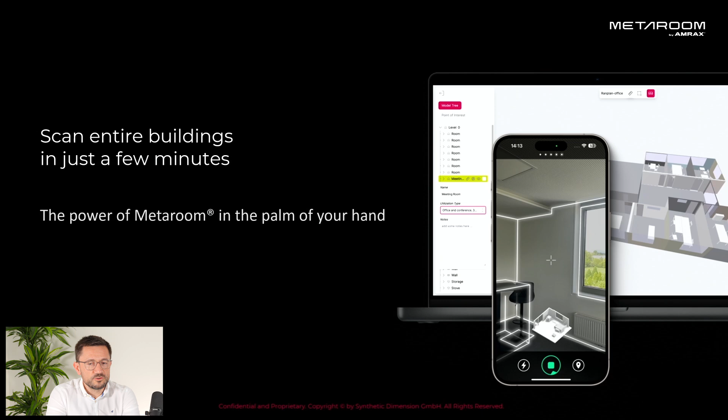So let's jump into the solution. You can see here on the right side 2 pictures. One is the Metaroom Scan app, which is running on iPhone Pro and iPad Pro. And in the background, you can see our platform, which provides you a web interface to optimize and then also export your scans. So basically the workflow is always: you go from capture with the phone to the studio, which is running in the browser.

What are today's challenges? When we take a look at the different use cases across different industries, we often see tape measures, folding rulers, and sometimes laser measurement tools. These cases we can see everywhere, and basically this is kind of our competition. And also after measurement on site, you need to create a 3D model. So this is the second step after doing the measurement.

Clearly this is something we see across different use cases, where the one doing the measurements and the one doing the drawings of these measurements are not always the same person. We've heard and seen this story a lot: person one does the measurements on site, sends these measurements to someone sitting in the company, and then there's a question - maybe a luminaire is missing or some measurements are missing - and a call is set up to ask person one, 'hey, do you remember what was here in this room?' Typically person one is not on site anymore, and then this cycle of problems starts like an engine. This altogether takes time, and that's exactly what we want to solve with Metaroom.

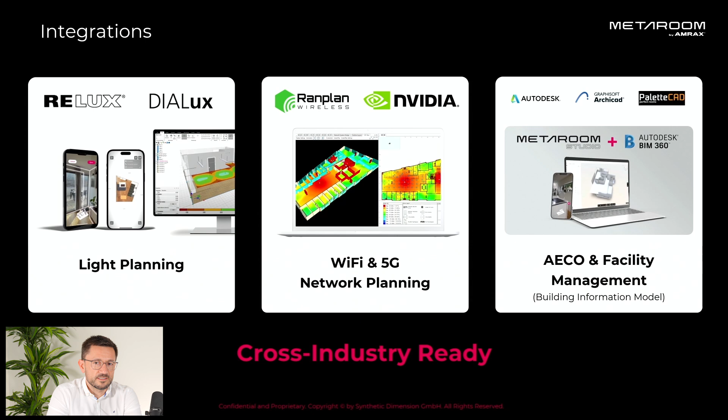When we come to the solution in more detail, let's start with the capture process. Every customer journey typically starts with this: people download the app, they start scanning, and I want to talk to you a little bit about the KPIs of this technology and also what you can expect.

I think it's easy to use. As you can see on the right side in the video, you can see these white lines that also represent what you already captured and what is missing. You can add specific information. Henrik will go over this a little bit later.

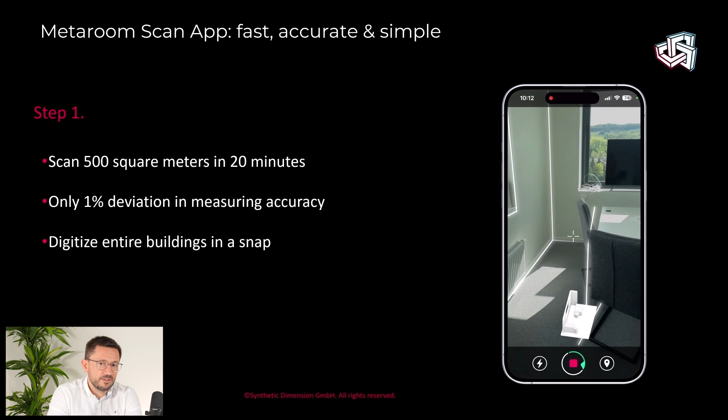When it comes to accuracy, typically one of the first questions is, how is the tolerance in measurements, how accurate is it? I have to tell you two things before that. One, a newer device performs better, so an iPhone 15 Pro is better than an iPhone 12 Pro. And it's also true that better light conditions create better scans, so the more light you have, artificial or natural, the more accurate the solution. Typically, when we are not in bad conditions, we perform with 1% deviation, which for a standard room means 2 to 3 centimeters deviation from one wall to another.

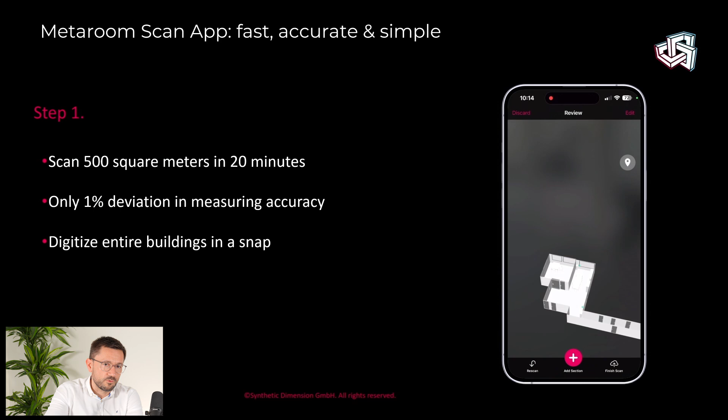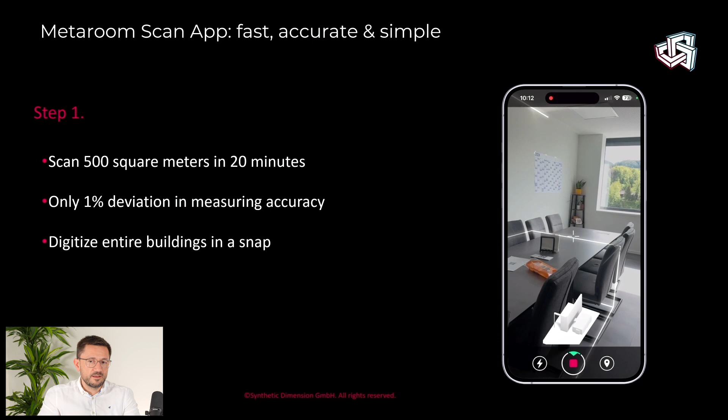The second typical question is, how big a scan can I do, and how can I scan a full building? We'll jump into this in more detail later when it comes to scan techniques. But what we can tell you now is that there are basically no hard limitations when it comes to floors. You can scan a room, multiple rooms, or a full floor. When it comes to complete buildings, we would suggest it should not be larger than 1,500 square meters per scan, because then the whole load on the system becomes quite high. But that's still quite a good number already.

Then the second part of the workflow, and the second part of our platform, is the web platform, and you can use the same credentials to log in. Then you are in the browser, you have a mouse, a keyboard, a bigger screen. You can take a look at the scan you've done, which also helps in understanding the environment better, optimizing it better, and then ultimately exporting it to another software.

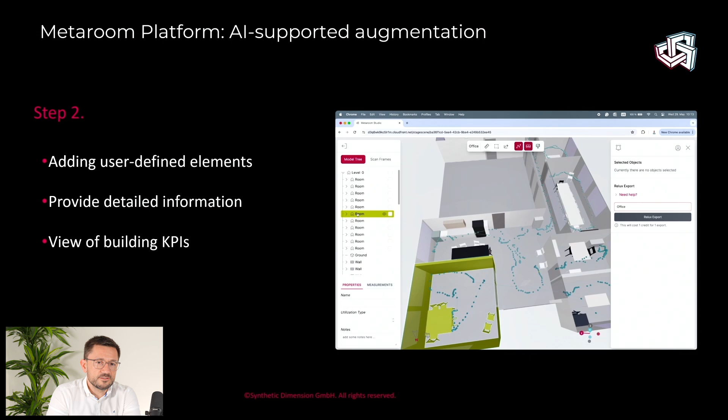If we go into scan techniques, we can see there are three different types. First, everyone suggests starting with a single room, so maybe it's not a good idea to jump into a big industry hall and start your first scan in a challenging environment that needs a little bit more experience. So let's take a look at how a single room works.

That's quite easy. You just start in the center of the room. You move around like in a circle while moving the device a little bit up and down, and the white lines will pop up and everything looks good.

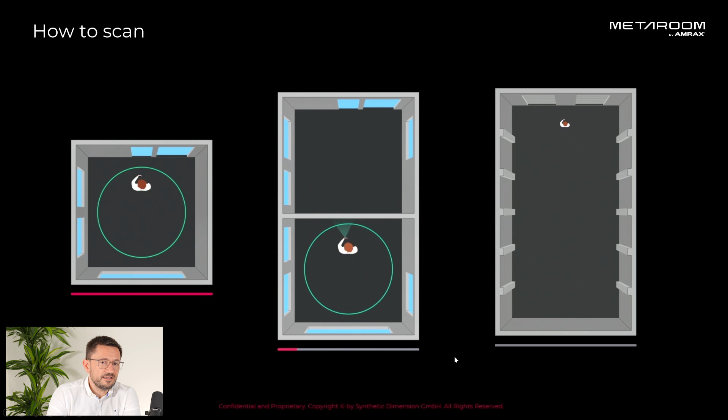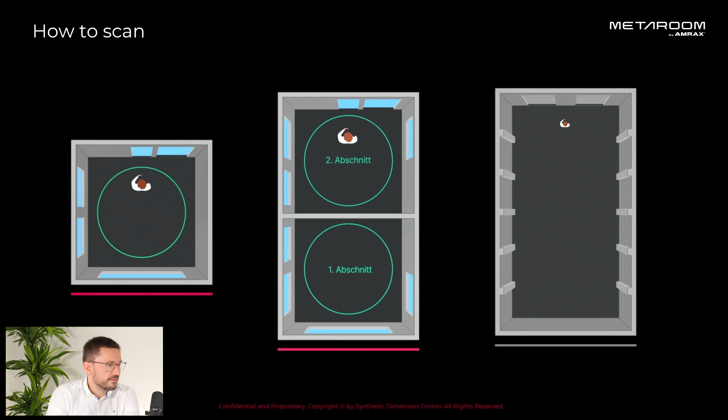If you do multi-room, this means two single rooms, it's also a two-step process. You start in the first room, complete your scan by stopping, go into the second room and add a second section. There's an 'add section' button on the lower end of the UI. This is typically something that I'd say 90% of first-time users don't do this way, and I totally understand it, because it's not intuitive. You start scanning, and if the door is open, you just continue into the second room. But that's exactly not what we want. The solution is to complete one section, which can be one room, then stop, go into the second room, and add a second section.

So that's multi-room. What about large spaces? Let me add one thing here: we're not only talking about 2 rooms, it could be 2 or even 20 rooms following each other, section per section, whether it's 2 rooms or 20 rooms. And even in both vertical and horizontal directions, it would be able to scan a whole house basically.

Oh yeah, thank you, Henrik.

That's just an example for 2 rooms. We had buildings with up to 50, 60 scan sections representing 50 to 60 single rooms, using this technique shown in the middle of the slide.

When we go to large space, meaning bigger than 20 by 20 meters, you can use the same kind of workflow to separate your large space into several virtual smaller scans. So we do the first scan in one part of this large space, then a second scan, a third one, and a fourth one.

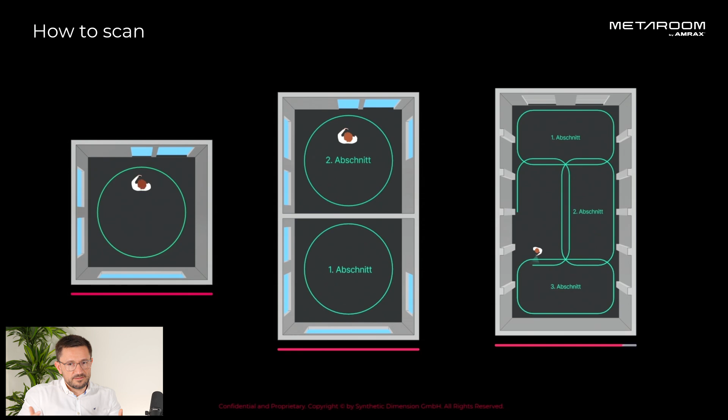The best way to do it is to have all these scan sections overlapping a bit. Obviously, due to objects and specifics in the room, this cannot always be done exactly as shown, but this is just a concept of how to do it. One scan section, whether it's one room on the left, a multi-room in the center, or a section on the right, should not extend beyond 20 by 20 meters.

We're also helping you with a dynamic assistant that does live measurement in the scan, and Henrik will show you afterwards how this assists you in estimating how big your scan section is.

That's exactly the moment where I hand over to Henrik for the more hands-on part. And this is what CEOs do, you know - when it comes to work, they forward it. That's not true, not at all, not always.

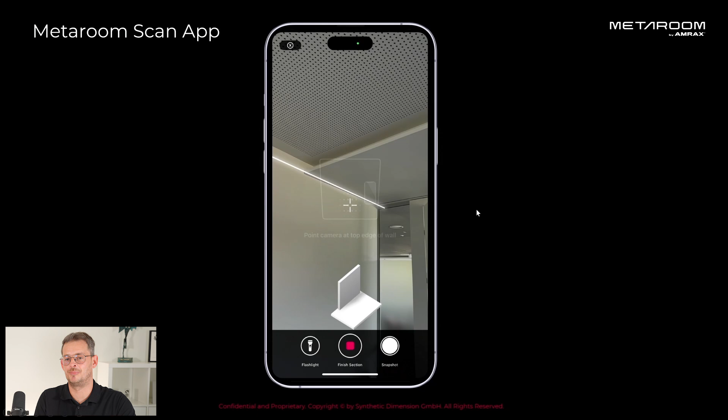Not always. Basically, what we see now is a demo of our headquarters in Salzburg, right next to where we're sitting. What you see is the interface where you start a new scan by hitting the plus sign down there. Afterwards, the app tells you what to do, like move the device to start. In a few seconds, white lines will appear to show that the scan is initiated.

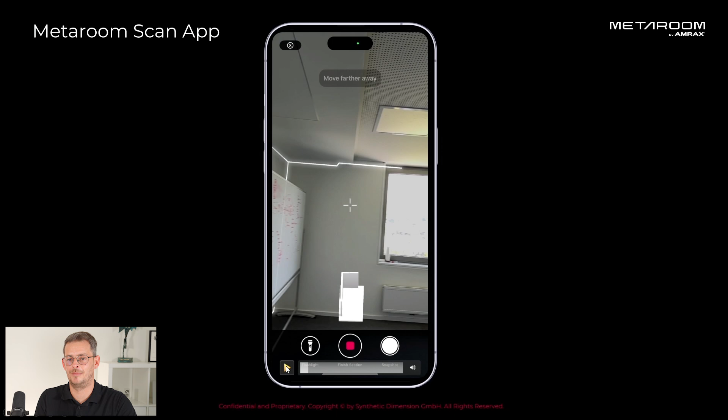I'm going to stop for a few seconds here. What you see down here is the so-called puppet house, as we call it, where you see what you've already captured, which should help you see what you haven't captured until you're done with the room. This is not the final version of what you get - it's just a helpful piece to see how to move forward.

So jumping through the room, you see that the app is, as of today, capable of capturing 16 object classes, which includes chairs, tables, windows, doors, cabinets, and so on. But there are still some objects the app doesn't capture - what we're going to do with those objects, we'll show you in a few seconds.

So basically we've done the first room and hit the stop button. What you see is a first overview of what you'll get, and there are 3 options now. If you're done with this room and don't want to scan any other rooms on the floor, you just hit the finish scan button. It goes up to the cloud, and after reconstruction, you'll receive an email saying your 3D model is ready.

On the other hand, there's the option of rescanning. There are 2 ways of rescanning: either the whole scene or section isn't good enough, so you scan the whole section one more time, or, let's imagine over at the wall there are some missing cabinets - you'd be able to add another section by scanning the wall one more time, and the data gets overwritten to show the cabinets are there.

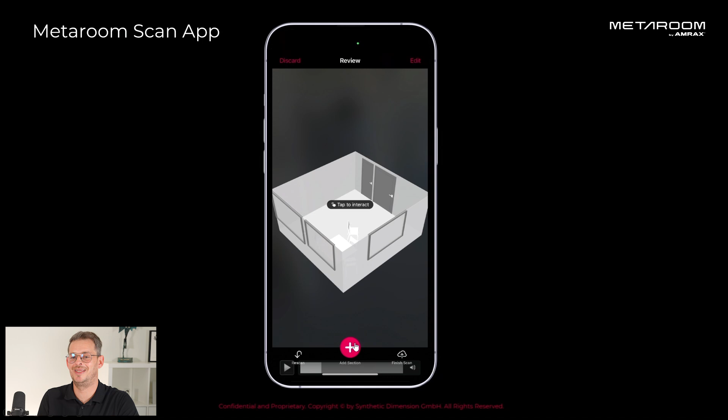What we're going to do now is move out of this door, stand in front of it, hit the plus button, and add another segment. So as we're talking, we're moving out of the room, standing in front of the door, and hitting the plus button. Another section has started - you see the white lines again - and we're going to move into the open kitchen.

What you see in the middle of the screen is the white cross. With the white cross, we're able to aim at several objects which the app isn't capable of detecting today. With the coordinates we aim at here, we'll be able to work on those objects later on in the Metaroom platform.

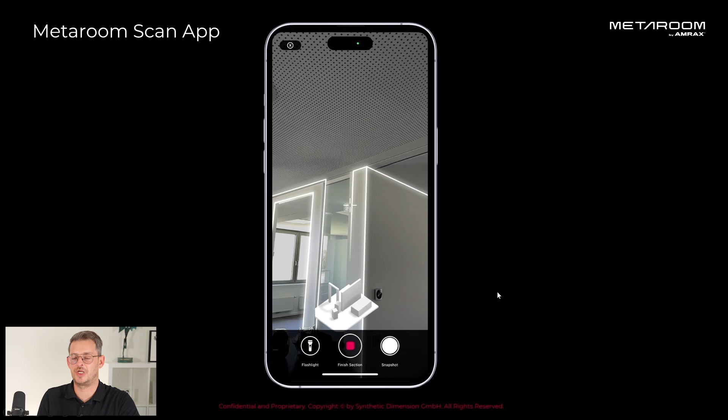We're just walking in through the open kitchen now, and what you will see hanging at the wall is the heating, or the radiators, in a few seconds, which the app won't detect at the moment. So what we are doing is aiming for the heating and pressing the snapshot button. You will see the green frame, and it will count the number of snapshots up there.

Same as what we are going to do now with the luminaires at the ceiling, because it's interesting for our planning later on. We are going to set a snapshot here.

While walking around the open kitchen and floor now, you will see a round column appear in a few seconds. As of today, the app has a bit of a problem with round surfaces, I would say. Same with the round pillar or column we're going to see here. As you can see, there are no white lines appearing, so basically what we have to do is set a snapshot there as well.

There we go. And now, as Martin mentioned before, we are walking through the whole floor. The open question is, at what time do I know that a section is too big? You will get a warning. The warning says the limit is close to being reached. Please go back to where you started this section and come back here and start another section. This is the first warning.

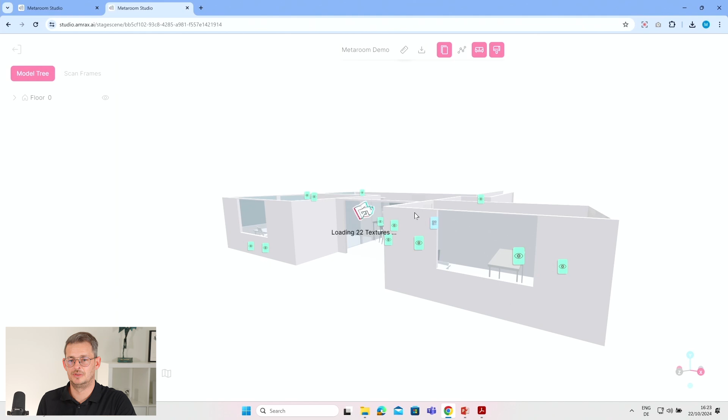But let's start at the beginning by hitting the Projects tab. You're going to end up with a full list of everything you ever scanned. We are going to our Metaroom demo room, the one we just saw in the scan video, hitting the button and ending up seeing the reconstructed 3D model now. Just wait until we have loaded all the textures. There we go, and this is what you get basically after a few minutes.

But let's start from the left side. What you see here is a complete model tree of everything the app detected while scanning. So you get the whole floor, and even the AI already predefined some rooms, which you can just click on and see here. On top of that, you would be able to open the rooms as well and see every object the app detected while scanning.

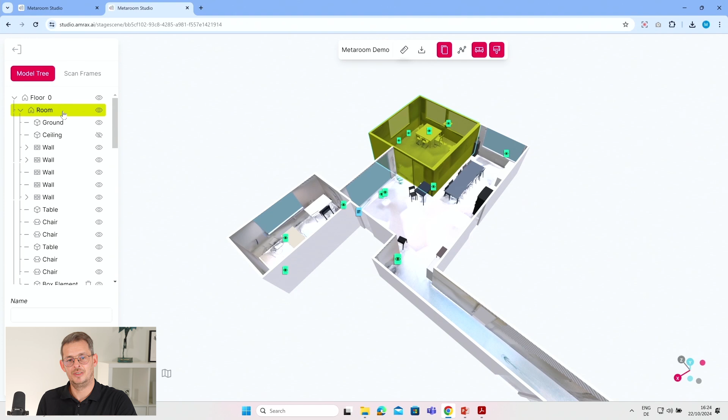From here, you would even be able to rename it if you like, and add some notes. You can use the Metaroom platform as a room book as well, taking all your notes and working and collaborating on them with more people.

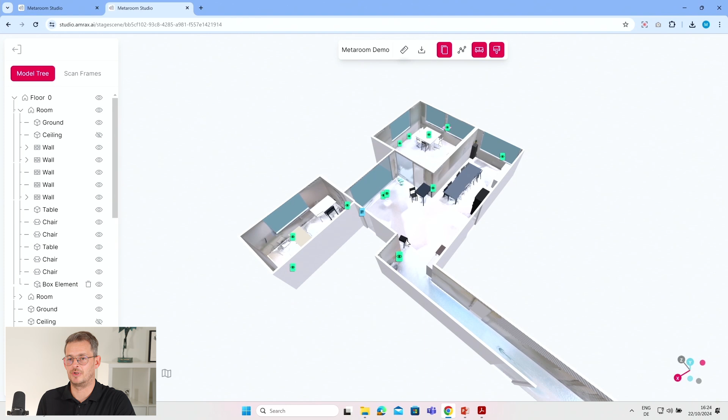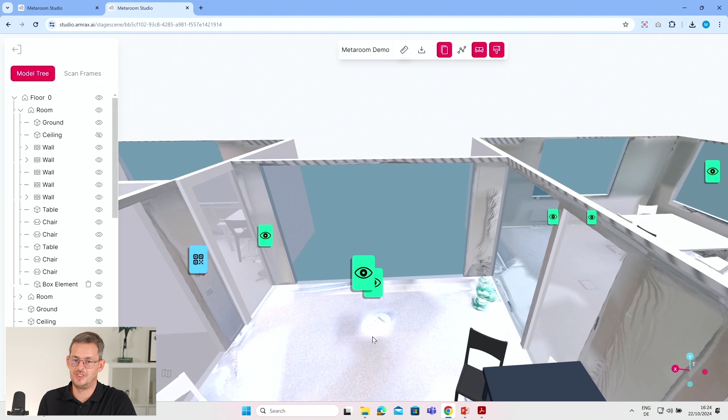Having said that, we are going to jump into the 3D model. What we see here is all the green cards, basically the snapshots we took while scanning. This is what the textures are really good for, because if we move further into the scan, you see the texture on the floor which should have been the column, which couldn't be detected by the app. But luckily, we did a snapshot on it.

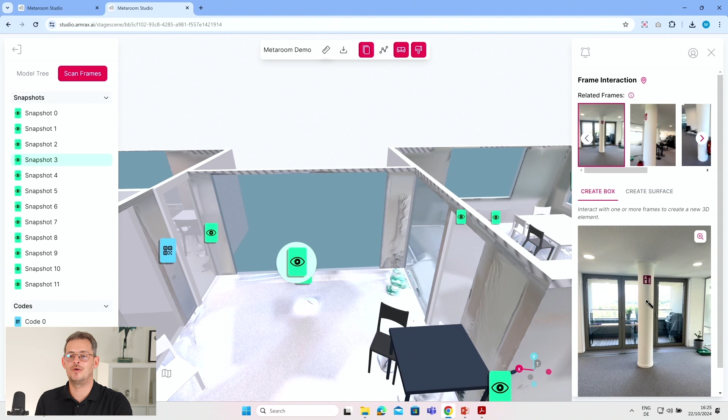I would be able to click the snapshot, and now the magic basically happens. What you see here is, at first, it looks like a plain 2D photo snapshot, but actually we are working in the 3D world and 2D world at the same time. You see your mouse changes to the magic pencil, we call it. From now on, our AI would be able to detect objects within this scan frame, or even the snapshot.

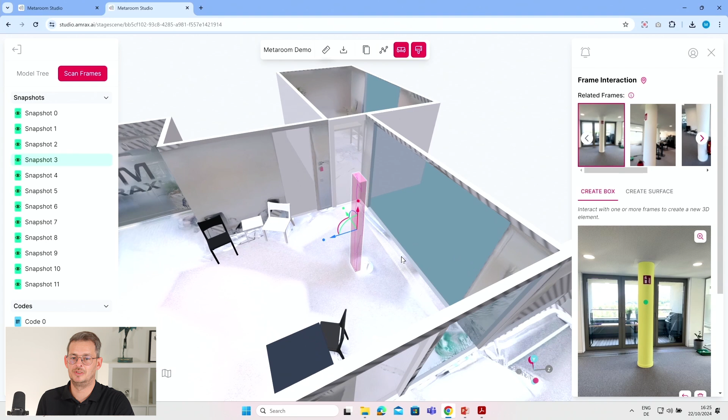So it's really important to rework that column and get it back into the 3D scene again. Basically what I'm doing is clicking on the column, and it creates a box for me right where we set the snapshot before. I would be able to rework the column, like to hit the structures on the floor.

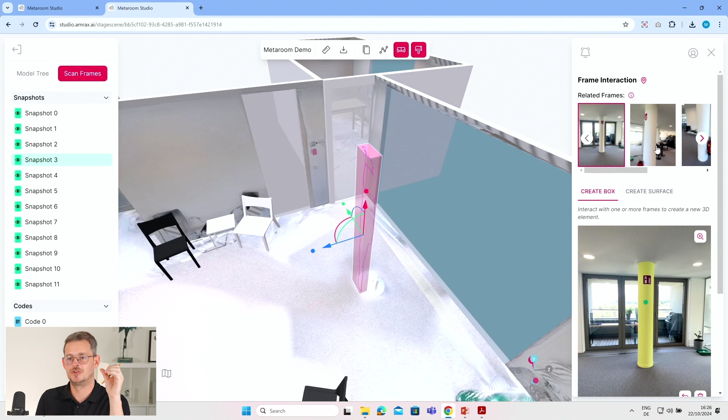What you see up here is that the AI detected more of those frames, next or from a different point of view or angle from where I set the coordinates or the snapshots. So I could move through those pictures, saying okay, this is the next one from a different angle. And the AI still recognizes that I'm working within the same object, just hitting the column again. We're going to get closer to the real surface, I would say.

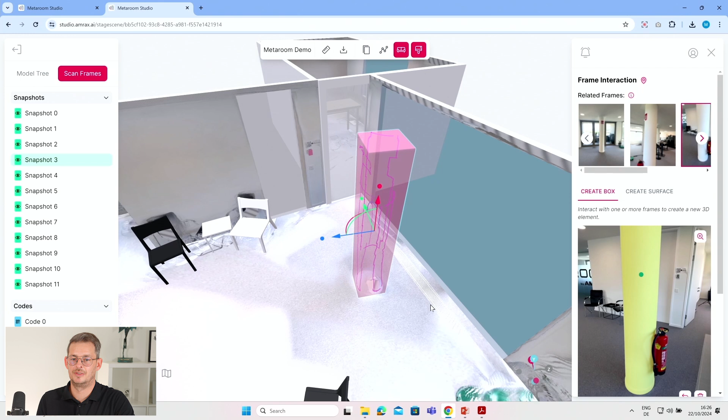There's a third one over here. I'm just giving it a last click, and basically we found the whole structure, just putting it in the right direction.

And basically giving it a name if I like to, even the IFC type, by just saying this is a column, and saving it basically to the environment.

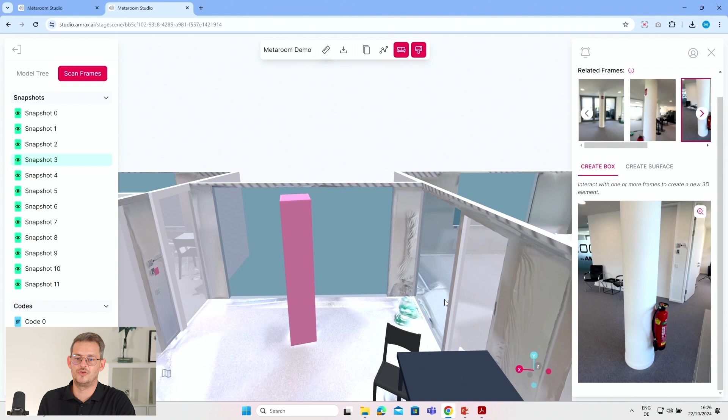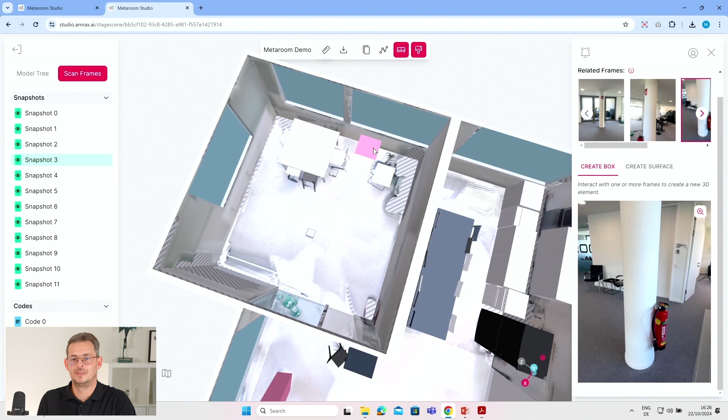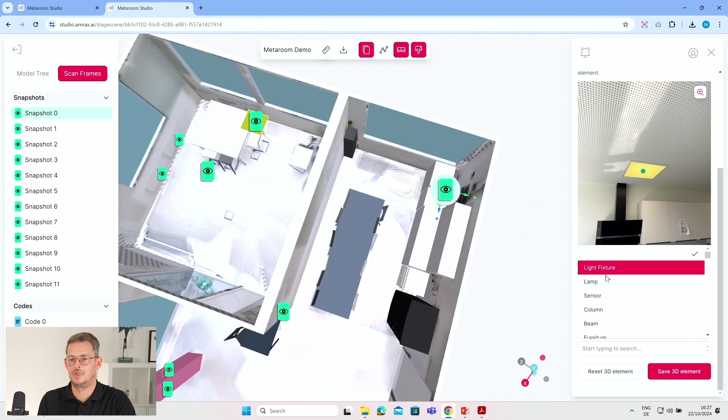We could do this with every object we find in those snapshots. What you can see on top here is some pre-work already done, seeing this luminaire which we already created an object of. Going into the kitchen, we find another luminaire, and we would like to add this one to the object as well, just by clicking it again, and it will appear. We save it again, saying IFC type lamp in this case, and we would have it as a 3D object.

Again, this would be possible with every object you find in those snapshots. But there are sometimes when you have to run through an object pretty fast, because there isn't much time - your boss told you to work through the whole object quickly.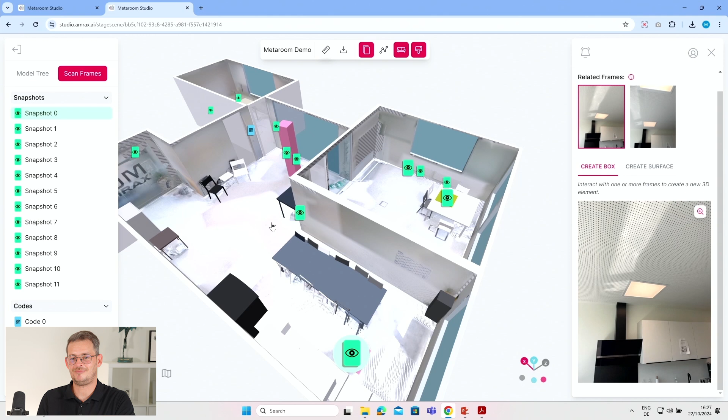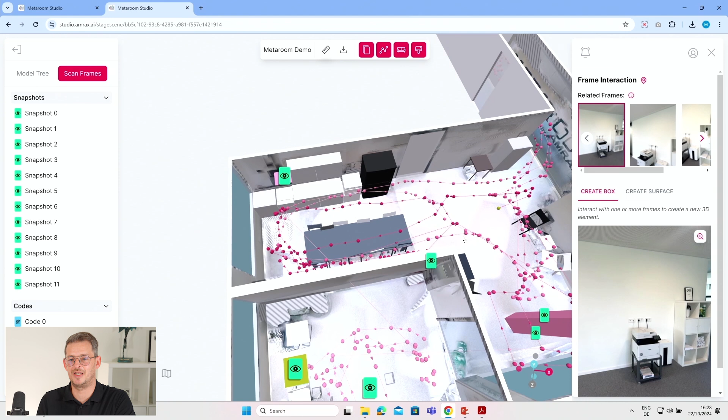What if you forgot to set snapshots somewhere? On top of that, we are helping you as well, because there is a button in the toolbar called 'show scan path'. We would be able to show you how the one who scanned was walking while scanning, even the direction he was walking through. If we hover across those pinkish balls, you will see in which direction the person was looking while scanning. And you would even be able to open those frames as well.

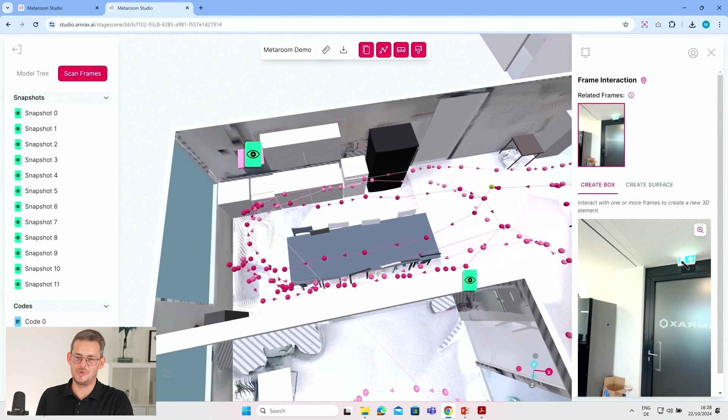So let's just pretend we forgot to set a snapshot on the emergency light. With one click, I could add it to the whole scenery and save it pretty fast. So even if you have never been to the object yourself, and you are the one to recreate that 3D object or model, you would be able to walk through the whole scan scenery basically.

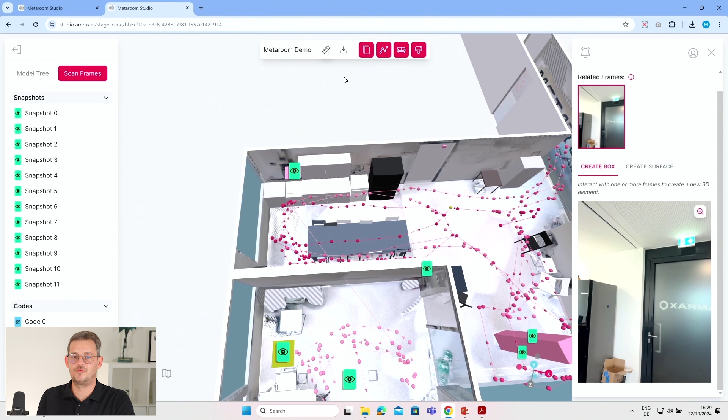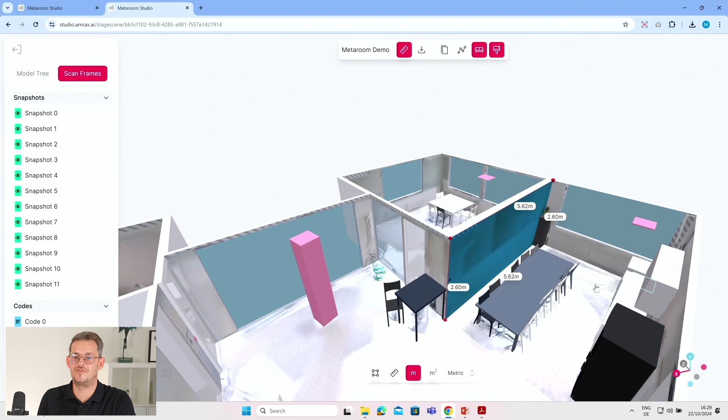On top of that, talking about the toolbar up here, let's see what the other buttons are for. We're going to hide all we saw before. Of course, there is a measurement tool as well, with which you would see the measurements you need in terms of height and width for every object. Even the table would show you all measurements.

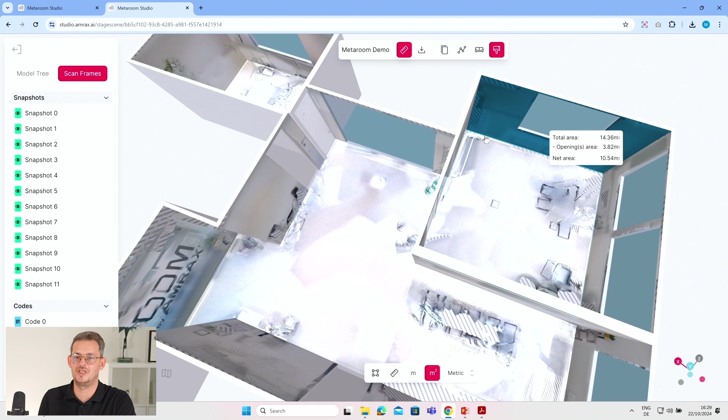On top of that, talking about painters, if they need the total area or the net area excluding windows, we would be able to show that as well. Of course, there is a way to hide all the assets to get a better view of the whole object, or even hide the textures, which makes it a bit calmer if you'd like to rework it without seeing the textures. This brings us basically to the last button, which is the export button.

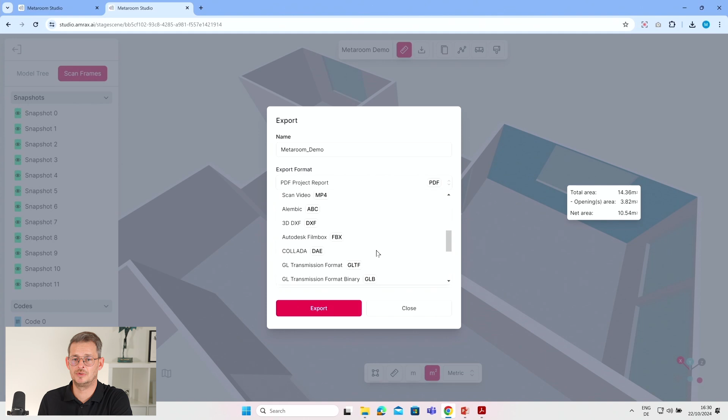Just imagine we have done all the after work more or less, and we would be able to export the stage or the scenery, where you can see all the different export formats we are serving at the moment, by just scrolling up and down. We have different IFCs, COLLADAs. If you find an export which we don't serve with yet, please drop us a note and we would try to make it happen somehow.

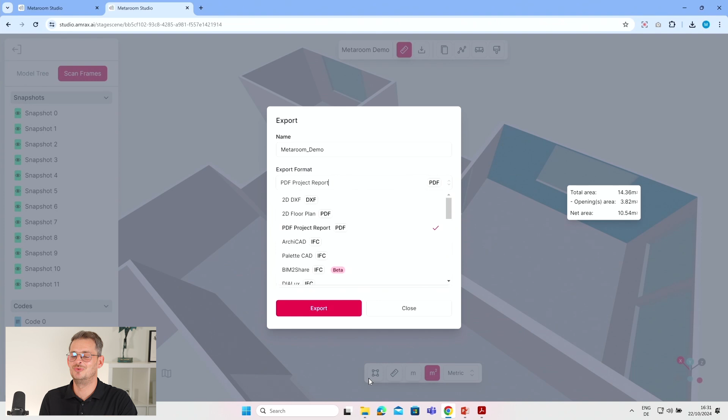On top of that, as some of you might be informed about, we made a step, I wouldn't say backwards, but in the other direction, coming back to 2D scenes, losing one dimension again, because we had a lot of requests from different industries saying, hey, I would like to have a plain 2D DXF, or just a 2D floor plan, or even a project report. I'm going to show you the project report right now, because this is what we think turned out to be really, really good, and the flagship of everything we did when it comes to 2D scenery basically. So let's just hope I find the right one now.

It's this one, right? Open it. By now you should see the PDF report of another object we just scanned beginning of this week, which is 170 square meters, a lot of rooms. This is basically what you get after 5 minutes of reconstruction directly into your export folder. We have 39 pages of a total overview, the table of content showing you how many floors, how many rooms, if you did snapshots.

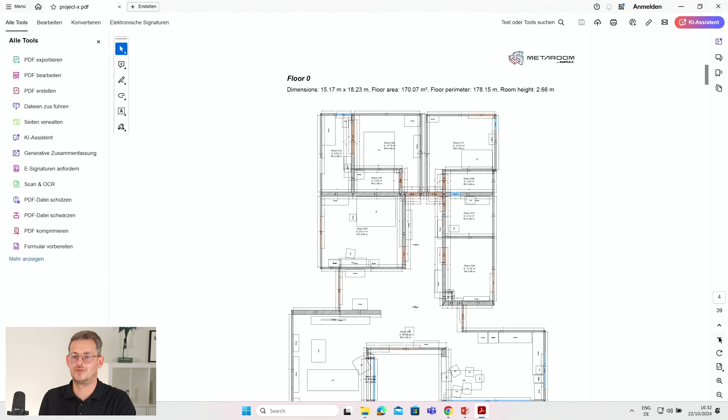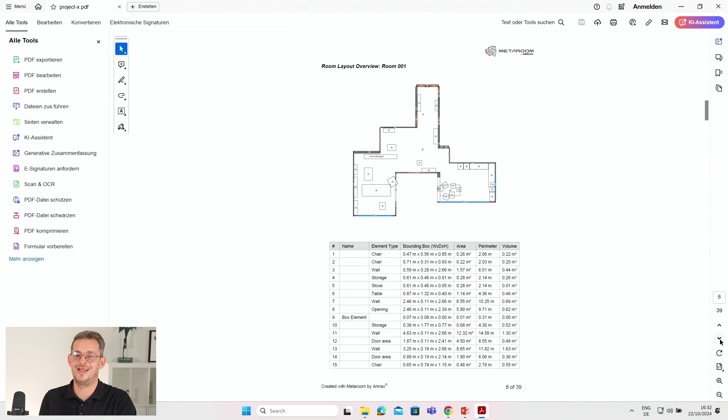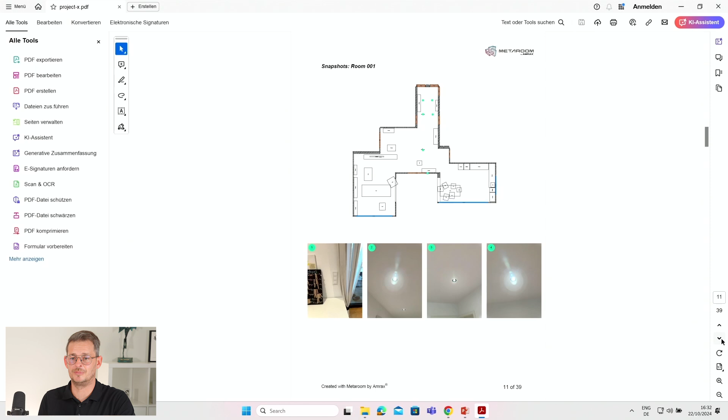On top of that, the whole 2D stage plan, where you would be able to zoom in until the smallest tile basically. On top of that, we are splitting it up even to all the different rooms, showing you one by one, and even all the measurements of all objects you will find in this room. And on top of that, we would even be able to send you all the snapshots you did with every room, just to make sure that once you print it and give it to either your customer, or you're going to save it in your own folders, you get everything with it. Even if you took notes, they will show up room by room here.

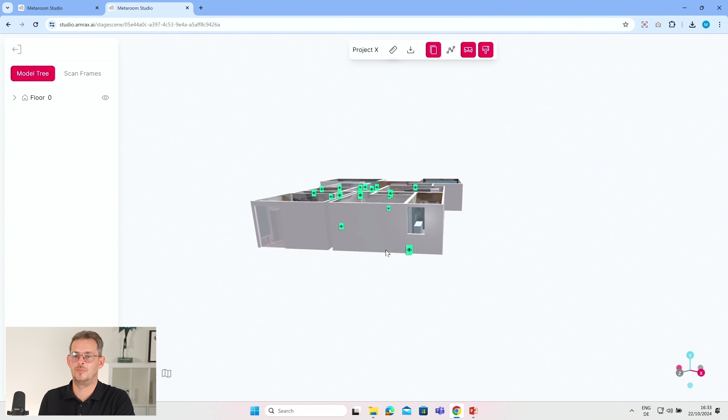What I forgot to show you is, let's say, a first case of how good scanning and not so good scanning could look like, showing you the project where you just saw the PDF project plan of. Basically, the better you scan, the more time you take for scanning, the better the textures will show up. What you will see here is I did a quite good job scanning here, where you see the whole floor and the structure really good, and having the room right here where I just scanned quite quickly. Every time we don't have enough data to reconstruct the texture, we're gonna set in a placeholder which will look like that.

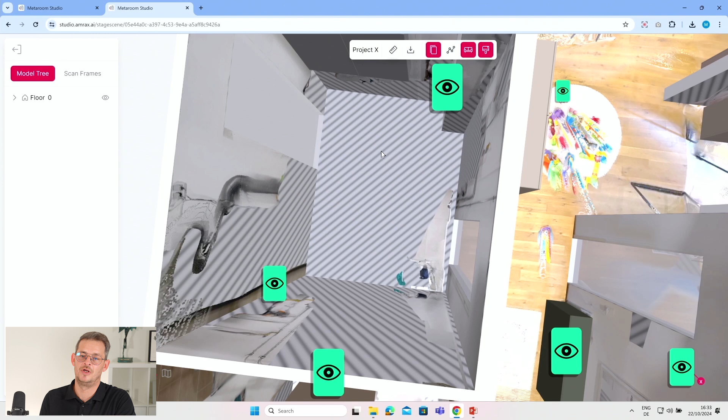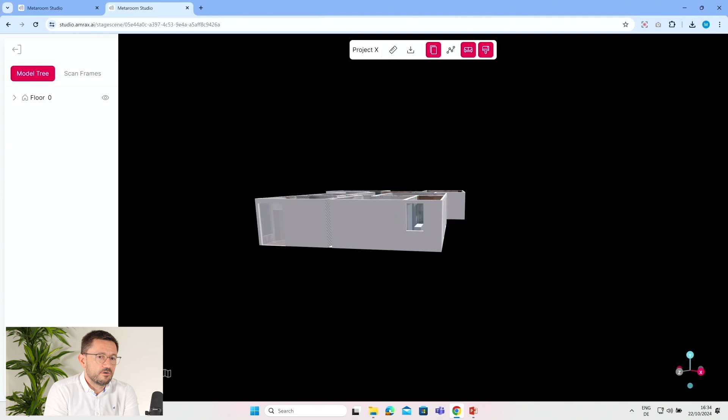Yeah, I think by now you should have gotten a nice overview of what the Metaroom platform is about so far. Did I miss something, Martin? Any open questions? Yeah, maybe what we could add is that also you receive a north heading direction, which could be possibly useful for light planners doing natural light calculation, and a GPS location, an OpenStreetMap location that you can also use.

Yeah, thanks a lot, Henrik. So this was the whole story from capture to going into the platform, doing all of these features on top. What we experience from the users is that, in every time, the customer journey starts with the app. During the scan with the app, you just have a preview. You can do so much more when you go to the platform, as you have seen now, the sneak peek, this allows you really to get all of these details into your scan that have not been captured automatically.

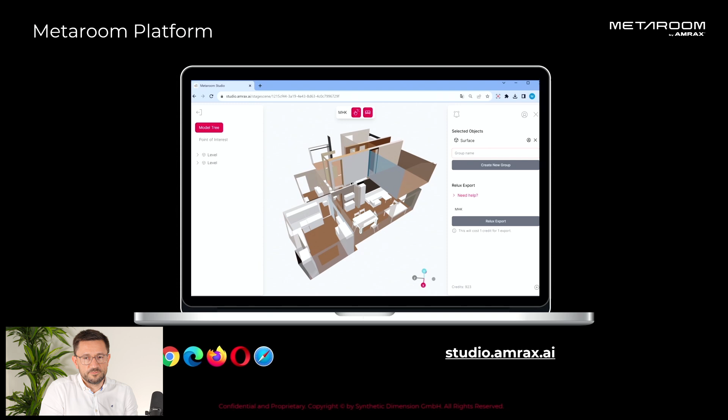So maybe let's jump into preparation. If you go into a building or a room you want to scan, it's a good choice to go around first before you start scanning. We want to give you a couple of best practice tips here.

The first one is, the more light you have, the better. So open the curtains, all the shadings, to let in all the natural light, and also turn on all the artificial lights. The more light you have, the better result you will get.

Also, everyone has this, clean the camera lens, as there's typically some dust on it, and dirty fingerprints. If you have kids, you know exactly what I'm talking about, those buttery fingerprints on the lenses and even the LiDAR sensor. Make sure it is cleaned as good as possible, because the result's going to be better.

Yeah, I also forget it all the time, but it's good to tell it to the people. Double mention that. Yeah, move the device slow.

In general, moving the device fast—for example, if people switch rooms and they have an iPad and then do a quick turn with the iPad, this can influence our solution with bad tracking, let's say. So maybe the rooms are then not built together in a perfect way.